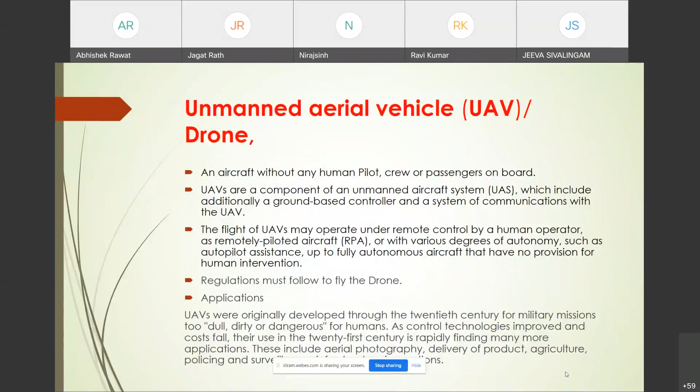Basically, the UAV was already developed in the 20th century for military operations, where it's very dangerous to send humans. It may be dirty or very risky areas. So unmanned flights were planned there, but at that time we didn't have sophisticated control technologies. Now these sophisticated control technologies improve flight and movement and reduce the cost. So these drones have been getting attention for the last 10 to 15 years.

Now the term RPA, the remotely piloted aircraft. Please note it down. The term RPA is generally used in official language as the official term for drones. Whenever you go for the registration of your drone with the DGCA or any government approval, instead of drone, they will use RPA. This RPA can also work as an autonomous aircraft, or you can make a model of the aircraft with simulation and test out each and everything.

When we talk about UAVs, there are 4 basic categories. You will find some differences in these categories from one area to another; this is the general category for UAVs. It is valid for both fixed wing and drone applications. For fixed wings, we have very small UAVs, if the weight is 250 grams to 2 kg, small if you have 2 kg to 25 kg, and medium if you have...

Hello, my audio is not properly audible? It's audible, sir. We have got messages from 2-3 people that the audio is not okay. I think maybe they're having a network issue. Sir, your audio is audible and your presentation is also visible. Dr. Gautam, please check this; the problem may be from your side. Thank you. So again, I am moving back to my presentation.

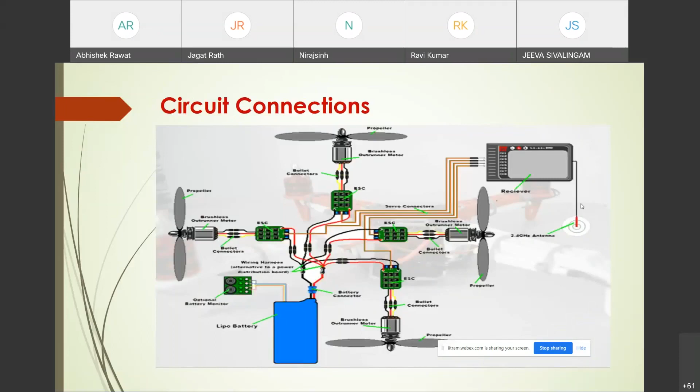This is the frame. The frame is basically the main body of your drone. It generally comes with the X design, but it is not always mandatory. If you're interested in carrying heavier loads, then you will take the ArduCopter Hexa type of frames, and you will also take the octocopter type.

In the last one, I think my cursor is visible. Please acknowledge my cursor is visible.

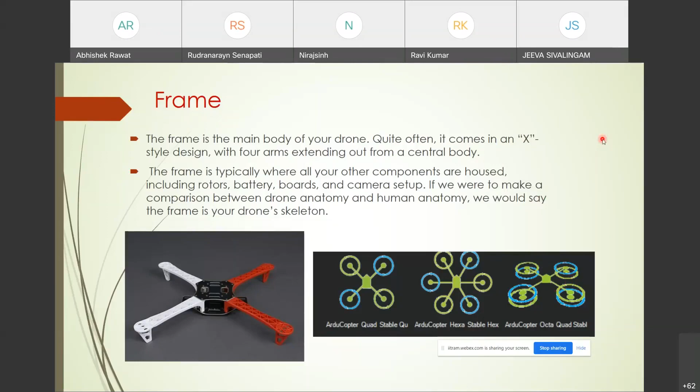Yeah. So in this last one, we will use 8 motors. Suppose you need a very high speed, then you will add back-to-back motors over here. For the frame we would prefer carbon fiber, but carbon fiber is costly, so generally we will use plastic materials.

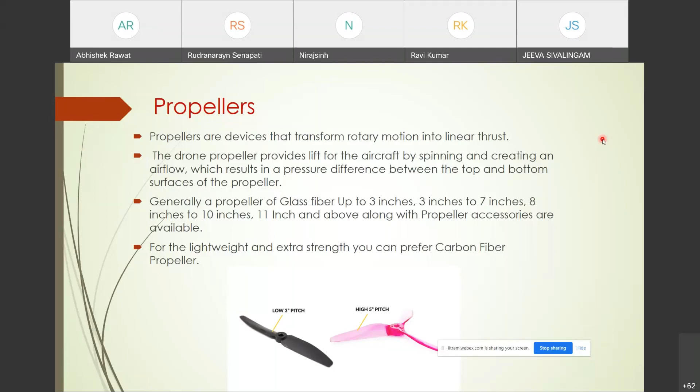The second is the propeller. Your motor is directly attached to the propeller, so the propeller will transform the rotational motion of your motor into linear thrust. The dimension of your propeller will define how much thrust you will get. So if you need more heavy thrust, then you have to design your own propellers. Right now in the market we have glass fiber of 3 inch, 3 to 7 inch, 8 to 10 inch, or 11 inches. So you have different categories, but generally we will prefer the carbon fiber propeller for the long run.

The third and most important part of your drone is the brushless motor. Every drone is using brushless motors right now. The reason behind it is that it is very efficient, very reliable, and generally most drone operators do not design their own motor. The brushless motor which is available for drones is very efficient, so it will save battery life, because in a drone we totally depend on the battery. So if your motor is efficient, of course you will get more flying time. This motor is also responsible for spinning your props and providing enough thrust to fly.

One other important thing is how you will check the health monitoring of your motor. Whenever you work on drones, always keep focus on the sound of your brushless motor. When you find the sound changes, then you have to check it again, and mostly I will prefer that you change the motor.

Otherwise, maybe it may work out. And the most important thing, you have to keep it free from dirt, debris, and so on. Of course, some brushless motors also come with covers, but they are very costly. So just try to keep it away from dust and debris and all these things. One other important thing is to always focus on the type of sound and spinning, especially during flights.

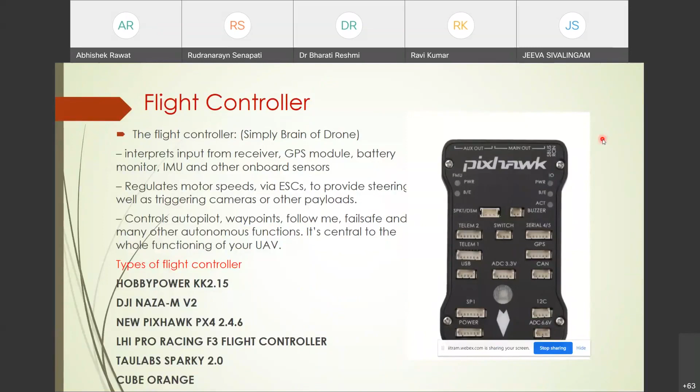The next is the battery. The battery is always a very crucial element of your drone, because the battery defines how long your drone will fly. 99% of the time we use lithium polymer batteries, in 2S, 3S, and 4S configurations. The 2, 3, and 4S configuration means how many cells you are using. Right now, we are using 4S batteries, because with 4S we get higher voltage power, and it is more reliable.

Of course, 5S and 6S batteries are also available in the market right now, but currently they are used for very specialized applications, so we don't use them here. Battery efficiency is a very important thing, and battery health monitoring is also very important. This is a lithium polymer battery, and sometimes it happened with us even in the lab that during the flight the battery ran out.

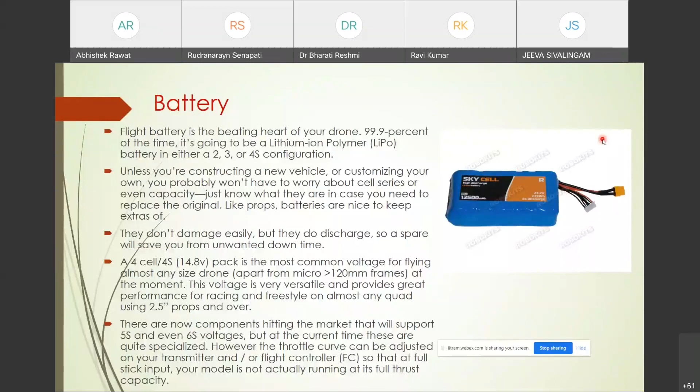You cannot just dispose of these batteries. This is a lithium polymer battery, so you have to dispose of it in the ground; you have to dig at least 4 or 5 feet, and then dispose of the batteries. Generally, you can use a 5,000 to 10,000 mAh battery for your drone application, depending on your flight time. This is the power distribution board.

It is analogous to the power conditioners which we have used in the satellites. Basically, power distribution is one of the very important components of the drones, which makes sure that your different sensors, controller, and all this get the power on one particular impedance level. I think you are familiar with the superposition theorems. Sorry, maximum power transfer theorem.

So every sensor and element has a different input impedance. So this is the duty of the power distribution board. They have to match the different input impedance of different devices. And if this particular power distribution board is nice, then the life of your sensors and your controller will be more.

Then the receiver is just one kind of sensor which collects the information from the external source and passes it to the flight controller. Okay, it is one of the very important things which consists of the antenna which does the radio signal processing, and it will also give the information and control the pitch, roll, throttle, and yaw with the help of 4 different channels. Generally, many receivers have auxiliary channels for performing certain functions or triggering flight modes, but generally 5 to 6 channel devices are recommended over here.

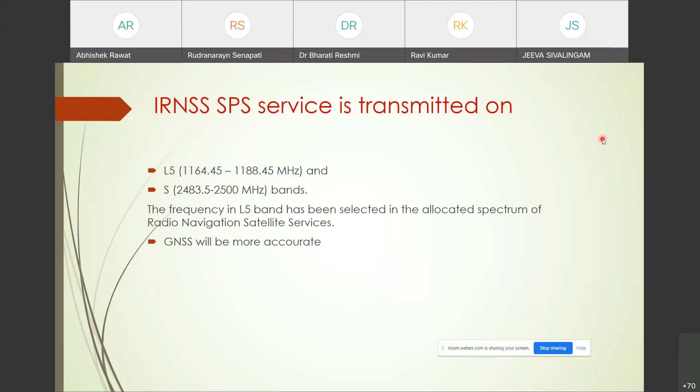But I'm very sure in 6 months or a year, this GNSS receiver will also be there. So for more accurate operation, you can prefer these signals. This is the spectrum, so you can see we will only work on the L5 and S band, and you can see the importance of the spectrums here.

Now the gimbal. The gimbal is one of the very important devices which provides connectivity for your cameras to your drones, and it can be rotated in the X, Y, and Z directions. Basically, it is used to provide stability and to point the camera and other sensors at a particular point, because when your drone is flying, there is air pressure and vibration. So even if you have a very good camera, it is not possible to take a very good picture without the gimbal.

One other problem you may face with the gimbal is known as the jello effect, because some vibration will be there, and because of the vibration your photo may be distorted. Then what you have to do is just change the gimbal dampers. Generally when you go for multiple flights, this is going to happen.

Any problem? Hello? Some person has... No, sir. Yes, please. Hello? Sir, I don't think there is any issue. No, okay. Okay.

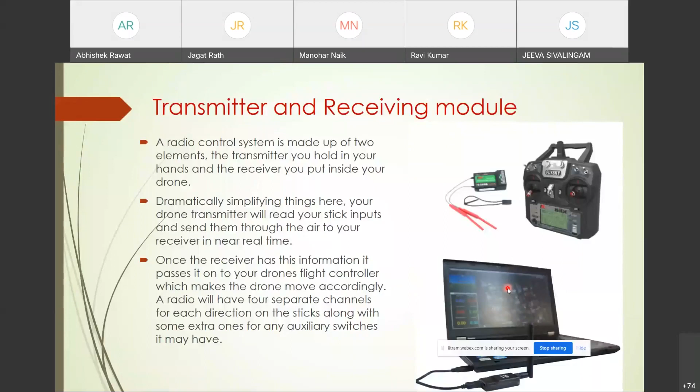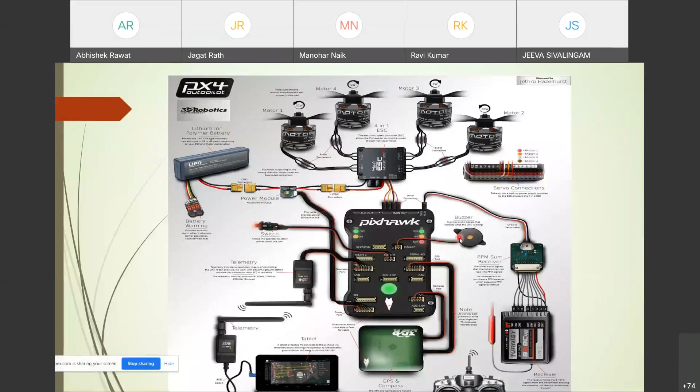Now I will show you one small video for the assembly of your drones. To assemble the drones, we need the motor, propellers, flight controller, GPS, ESC, which we have just discussed. So this is one assembled drone in our labs. You will find D-1 written over here. This is the number assigned to our drone by the DGCA.

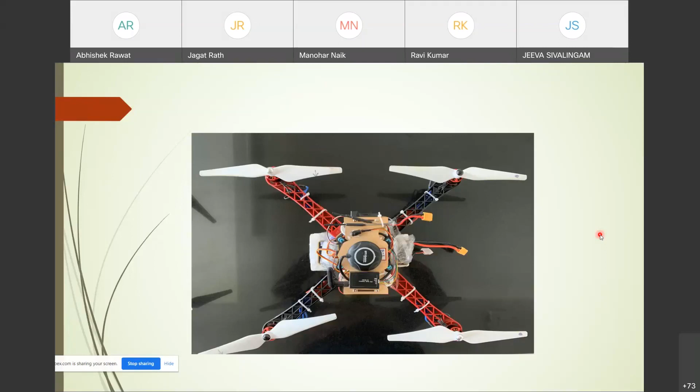Every drone must be registered on the DGCA portal, that is Digital Sky. And if you fly without registration of your drone, without the registration of your identity, and even if you fly after registration, you also have to inform the local police station 24 hours before, even if you don't have nano drones. If you don't, you may get a prison sentence of 6 months or a fine of 50,000 rupees. So be very careful when you fly drones.

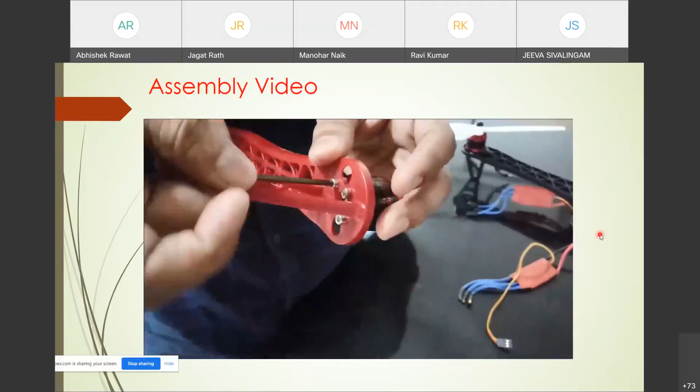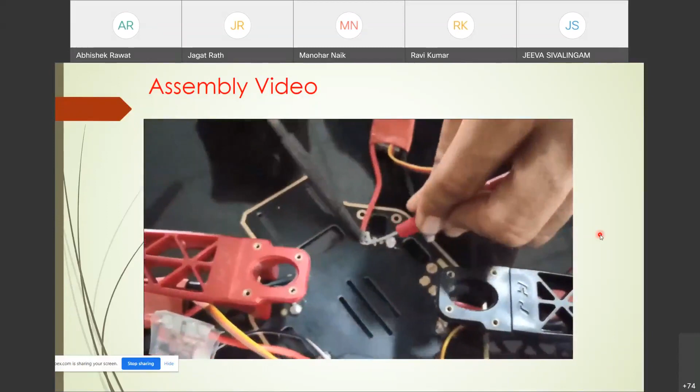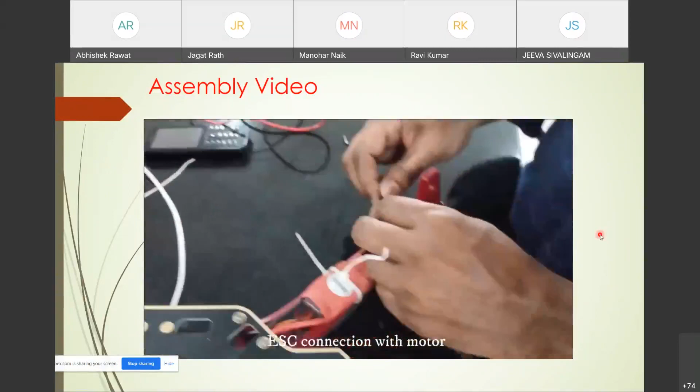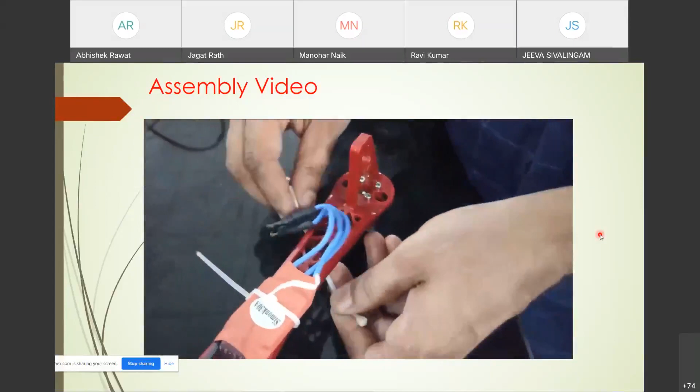Now this is the assembly. Please see. They are assembling the BLDC motor. This is the ESC. During the flight, a lot of vibration will be there, so this type of tying we have to do.

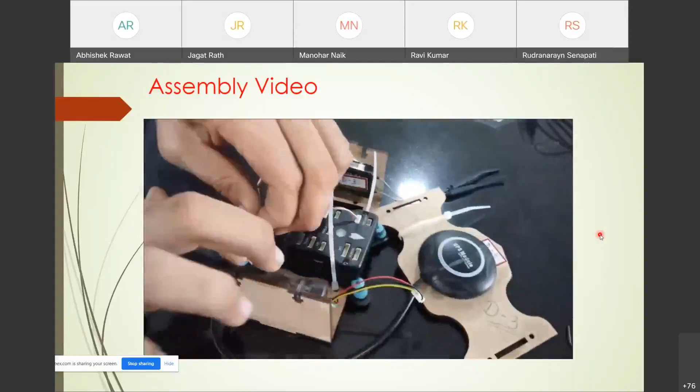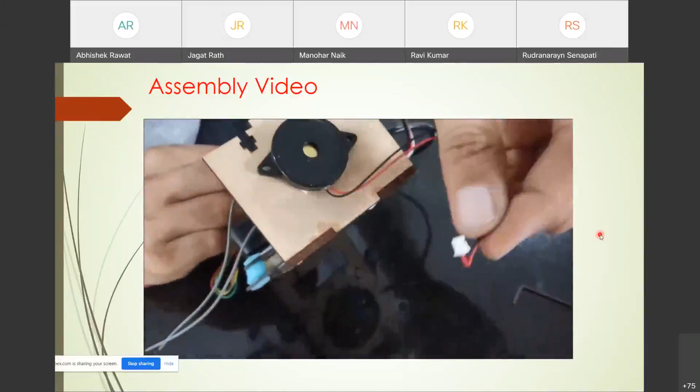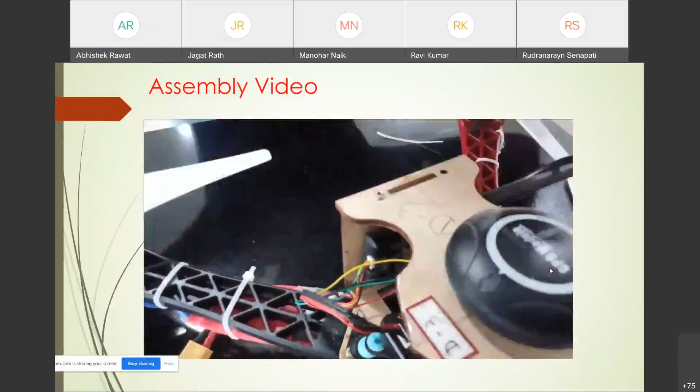This is a telemetry connection. Generally, two telemetries can be connected, one from your PC and one from your receiver. This is the 4 ESC connection to the Pixhawk.

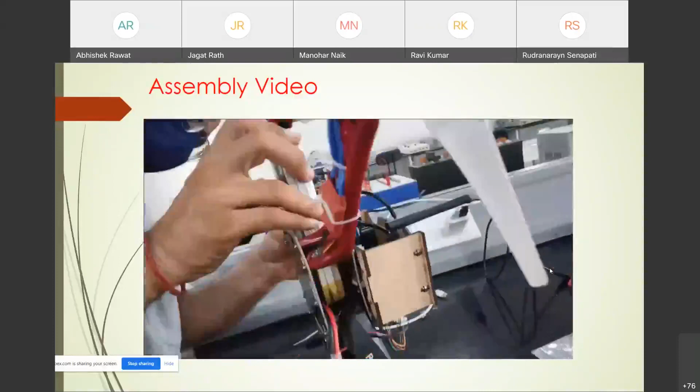Okay, so after this assembly, I think things are fine. One question was raised by one person, whether it can be programmed. Of course, we can connect the Raspberry Pi, and connect the Raspberry Pi with the LiDAR and camera, and do some coding and planning. Planning is one of the very important tasks. We will discuss the planning part later on, but of course we can do the planning.

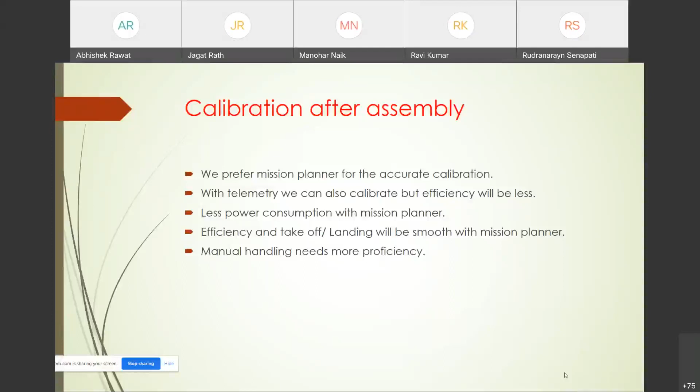Now, the calibration. I think the connection will be very clear with this video. So after the assembly, we have to go for the calibration. We will prefer Mission Planner, so it will be more accurate. Generally, with the telemetry we can also do it, but it is not very accurate. One other important thing with Mission Planner is that power consumption will be much less as compared to your transceivers, and generally the efficiency, takeoff and landing will be smoother. So we will prefer Mission Planner.

Mission Planner is a part of ArduPilot. ArduPilot is a full-featured, reliable open source software module, and it is used in plenty of applications, not only for drones and UAVs, but some kinds of autonomous robots. It is also capable of controlling every vehicle, even VTOL airplanes, vertical takeoff and landing aircraft.

And this autopilot is used by a large number of institutions, such as NASA, Intel, Boeing, and all. It is a deeply tested and trusted autopilot system, so I would also prefer you use it. And some people asked whether we can program it. Of course, with the autopilot, you get the liberty to program on your own. Even when you go for some specific mission, you have to do this type of coding.

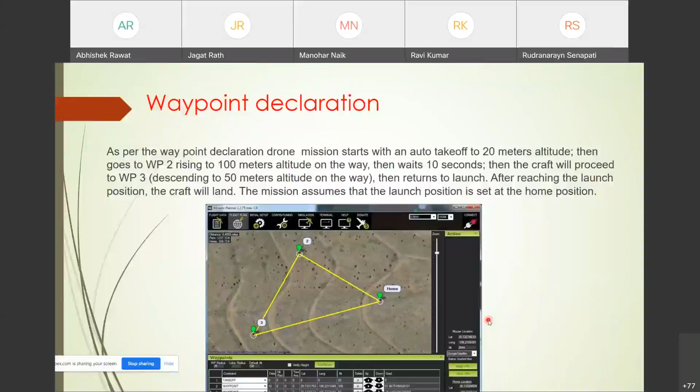The second is waypoint declaration. In waypoint declaration, in your Google map you can find your home. Then you give your waypoints, so your drone will go through the waypoints and return back. So right now here you can find it: the first is takeoff, second is waypoint, third is waypoint, and the last one will be your landing. So generally, with the help of that, you can give a predefined path, so your drone will fly the predefined path and return back safely.

So whenever you go for a Mission Planner flight plan, the three important things are the upper left corner, the right corner, and the bottom. All these three things will give you very important data. The upper left corner displays the distance from home, so you can know the distance from your point to your drone. The right side displays the waypoints of the mission, so you can see the waypoints of your mission.

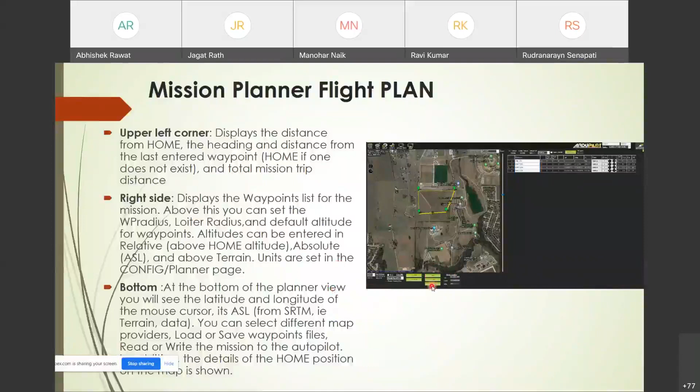Okay. Third is the bottom. You can see the latitude and longitude of your drone. So with its help you can easily keep control and visualize where your drone is moving right now.

So before flying your vehicle or drone, you must follow some steps. The first is calibration. In calibration, first is accelerometer calibration, then compass calibration, then radio calibration, servo ESC calibration, and some other optional hardware. If they are going to be connected, they have to be calibrated before your movements.

Generally, this ArduPilot or Mission Planner works on the MAVLink protocol. Okay, somebody is asking me if there can be programming here. Of course, you can do it. The MAVLink protocol gives you some liberty for programming, so you can write your own code and implement it here.

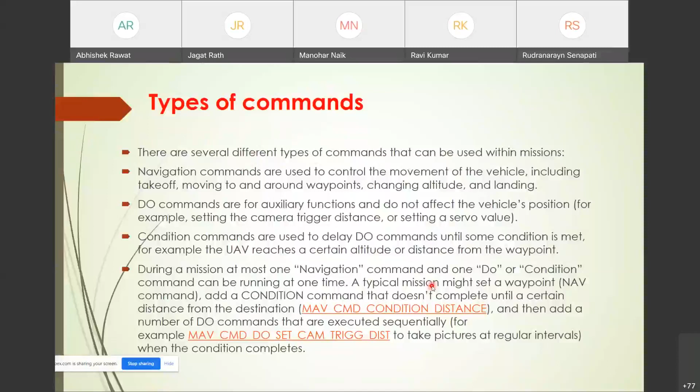I'm not going in depth about the MAVLink protocol, but some commands are already here, so you can write your own code. There are different types of commands in MAVLink you can use. Right now all these commands are already built into Mission Planner. But if you want to set up or customize your own drone application, you can type these commands and also make your own functions.

Now, one other important thing is camera-controlled automation. Sometimes it's possible that your GPS is not working. Then you can control your mission with the help of cameras. In some important positions GPS is disabled, and if somebody wants to assign their own modules, then you need camera-controlled automation. So instead of GPS, you have to rely on camera control.

So for camera control, the camera will be specified. Your camera should be mounted on a gimbal because very accurate pictures are needed. You need Mission Planner depending on the different photography, and you should know the waypoints. So whenever your drone is there, your camera will take a picture, check it against the database, and identify whether it is on the right path or the wrong path.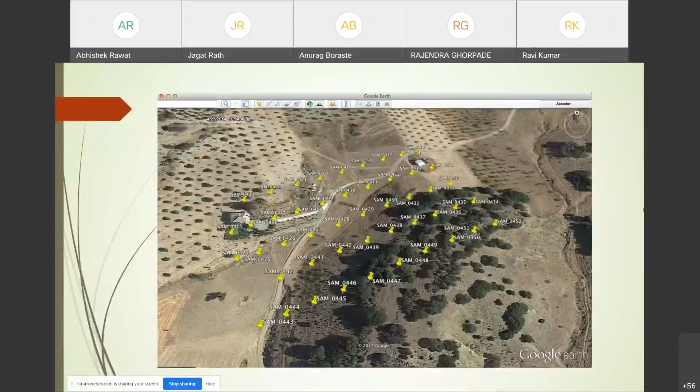So with the help of time span and with the help of your photographs, if you make the survey of a particular location, even without the GPS, your drones can communicate and move from one point to the other points. So in Mission Planner, lots of features will be there. We can connect. So some Windows icons will be there: Connect, Data, Plan, Setup, Configuration, Simulation and Help.

Someone is asking, sir, can we see the calibration? So we have prepared one small video. After the question answer session, this particular video will be run, so you can find it in detail. If you require, I will create it further in other sessions, because calibration takes a long time.

So generally what we have to do, first you have to connect the Mission Planner with the telemetry. When we get connected, then you have to go for the setup. In setup you have to go for the calibration, and after the calibration you have to go for the plan. In data you can collect telemetry and different types of data during the flight time.

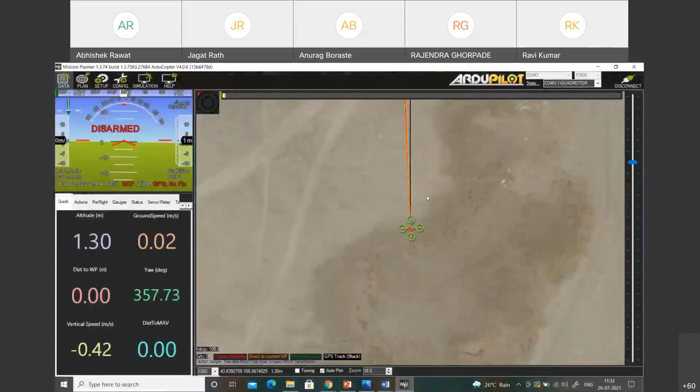Right now, we are connecting it. Once all these things are connected, you can do it. Because of limitation of time, we cannot go in depth here. Of course, one video I will run after the question answer session.

So this is all about the drones, but the most important thing is the regulation, which particular regulation we have to follow. In the last few weeks, we have seen some drones intruding into army establishments, and the drone is also very dangerous, because if your drone comes in the routine flight routing of commercial aircraft, it may be a disaster. So rules and regulations must be there.

In US and European countries, we already have very strict rules and regulations, but in India, the first regulation was implemented very strictly in March 2021 by the DGCA, under the Ministry of Civil Aviation. Right now, no license or permit is needed only for 250 gram drones, but it should not be very near to defense establishments or aircraft. If the weight is more than 250 grams, then you have to follow the guidance and registration on the Digital Sky portal. This is the link for the Digital Sky portal.

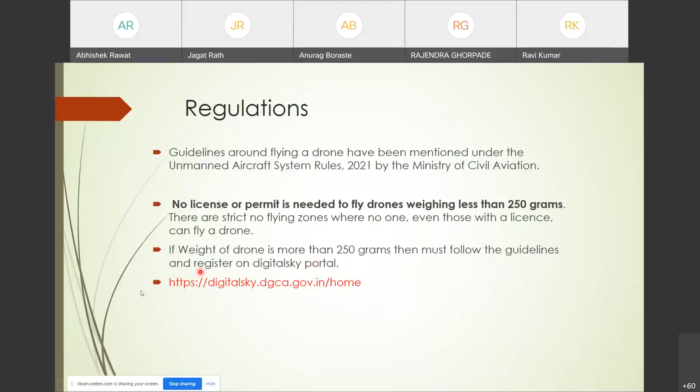Generally 250 grams is very small. Most of the drones which can go a long way are more than 250 grams, so you have to register your drones on this Digital Sky portal. These are the 5 categories described by the DGCA. The first is nano, up to 250 grams. The second is micro, 250 grams to 2 kilograms; most of your drones come here. Then small, 2 kilograms to 25 kilograms, where we have put some cameras and other sensors. Then medium and large drones, up to 150 kilograms and more than 150 kilograms.

So if you want to operate the RPA or drones, first you have to take permission for the import clearance from the DGCA. Right now, if your drone is small, no import clearance is required. Then you can take the UIN number, and insurance you also have to take with the new regulation.

Then you have to take the license. Then you need the Ministry of Home Affairs, you need the security clearance. Ministry of Defense, you need the permission for the aerial survey. Please note it down, without the permission of the Ministry of Defense, you cannot do the aerial survey. Okay, Air Force, you need the permission for the monitoring and the RPA movement inside the country.

Wireless Planning and Coordination Wing, you need the equipment type approval and the license for the RP. Bureau of Civil Aviation Security, you need the security approval for the security programs. Airport Authority, you need the flight plan approval, monitoring of RPA movement in the country. And the local police station, of course, 24 hours before you have to intimate over here.

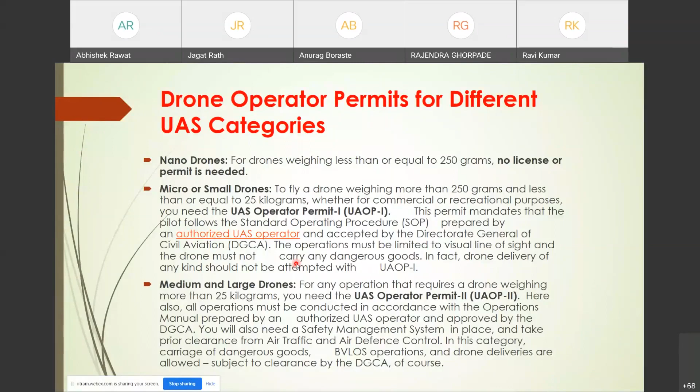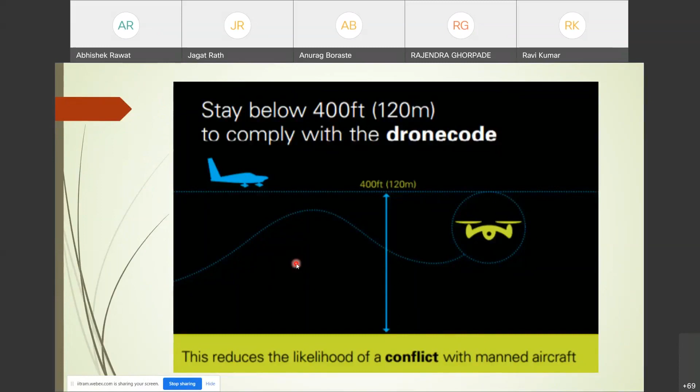For micro, we need the UAOP 1 permission. Medium and large drones, you need the UAOP 2 permission. Simply always keep your drones below 120 meters, because above that the commercial flights will be flying. The second thing, if you are a learner, don't keep your drone beyond your line of sight. And remember that you are responsible for your drone. If any loss happens, criminal cases can be filed.

You even have to take some kind of insurance. So these things also come under regulation. So my advice is that whenever you fly the drone, please be very careful about all these things. So no permission, no takeoff. It is one kind of module, and it must be put on the medium and large drones. Without it, you will not get flight permissions.

Okay, one of the commands we can put here is return to home. It can work as smart return to home, low battery failsafe. So suppose you go out of the transmission range or the battery goes low; in that condition, it automatically returns back to your home site. Obstacle detection: we can also put different types of sensors so that any obstacle in the middle of your path can be detected, and it will change the path.

Drone detection is also one of the very key and important areas in which a lot of research is going to be. But we'll discuss this particular drone detection in some other talk. Of course, Adani Defence will hopefully discuss some of that part. So this is all from my side.

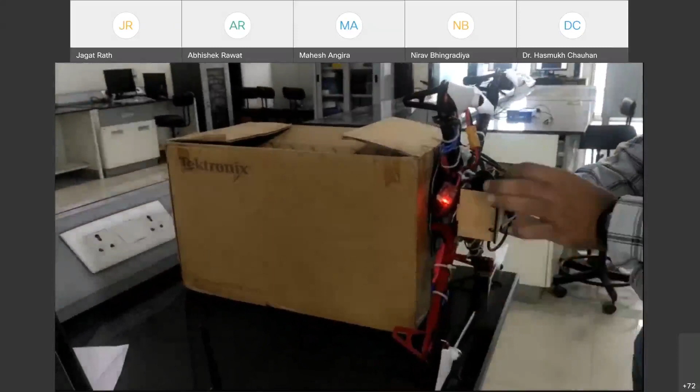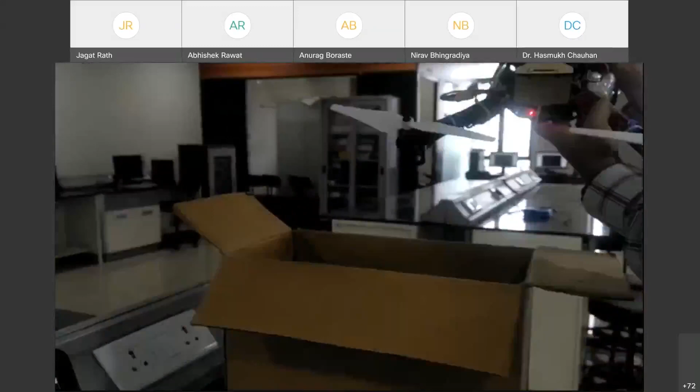Hello, sir. Yes. Sir, audio is not there. This is just a video to show calibration, so you can see the process. Okay. Yeah. Thank you.